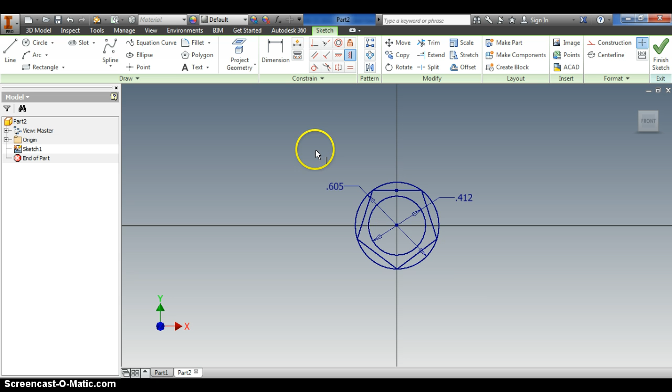I'm going to see if I can do this real quick. I haven't tried this before. If I go here and I choose construction, how about that? It turns them all into construction lines. They're dotted, which means they're there, and they're going to let me reference things and dimension things if I need to, but they're not actually going to be part of the final product.

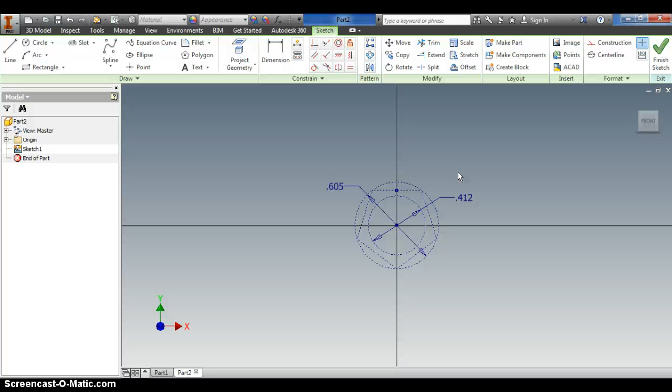So here we go. The process is very simple, actually. I'm going to create a line. Let's zoom in a little bit. I'm going to start here where the pentagon meets the circle on the outside. I'm just going to come down here and pick a point that looks close to halfway between. And then I'm going to draw a second line that meets at that same point. I'm going to repeat this process all the way around.

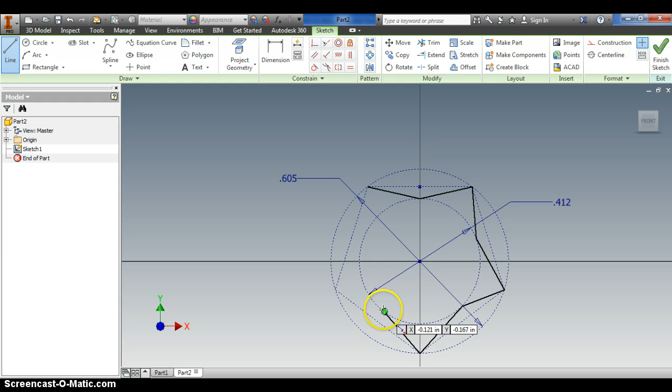There is a circular pattern tool, but we're not going to use it right now because I found out from personal experience that it just doesn't work well with the extrude feature. It wasn't going to let me extrude when I used that circular pattern. So if you're a pro and you're like, hey, I know a better way, just be warned that I tried that better way, and it didn't work out for me. So good luck to you. I hope you figure it out. We're almost done here, right?

Okay, so I've got this. I'm going to right click and choose OK. But the problem is now my star really isn't lined up. That doesn't look right. So I'm just going to use the equal tool real quick. I'm going to constrain every single line to be equal. So this line needs to be equal to this line, and this line needs to be equal to this line. I'm clicking two at a time.

This line, click on this one. Oh, it's over constrained. Okay, that means they were already equal somehow. I must have picked a green dot somewhere. This line needs to be equal to this line. This line needs to be equal to this line. So on and so forth all the way through. You get what I'm doing here?

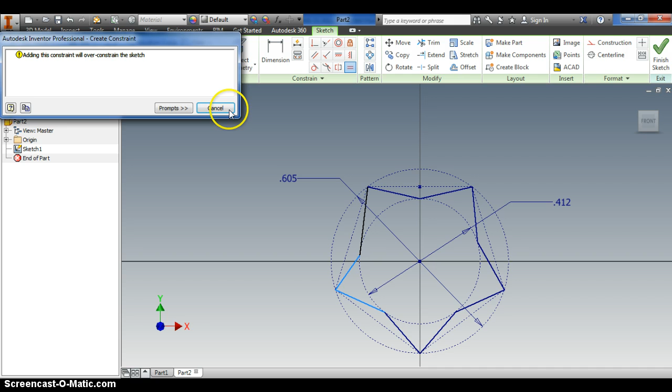Okay, so we run into a slight problem here. It looks like it's all good except for these last two. So I'm going to hit escape and get out of dimensioning. I'm going to take this one right here and just delete it. I'm going to take this line here and just delete it. I'm going to try that one more time. I must have locked into something that I didn't intend to lock into. I don't know what that is, but it doesn't really matter.

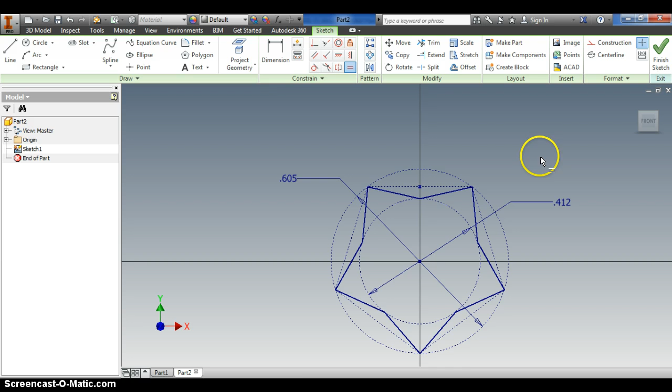Okay, and one more time, the equals tool. This one needs to be equal to this one, and now this one needs to be equal to this one. Over constrained because it was halfway already. Alright, so there we go. We've got our star drawn, and it's in the perfect location. And you'll understand that that's what I needed in order to finish this piece.